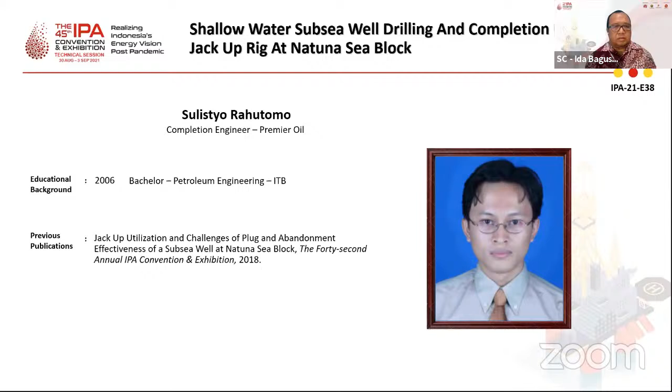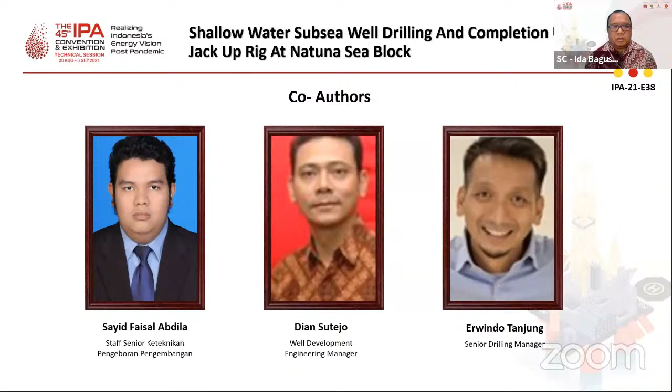The co-author is Bapak Sayid Faisal, senior staff in drilling engineering development from SKK Migas. Bapak Dian Sutejo, Well Development Engineering Manager from Premier Oil, and third is Bapak Erwindo Tanjung, senior drilling manager at Premier Oil as well. So we can start the presentation.

Hello, good day, ladies and gentlemen. Allow me to introduce myself. My name is Sulistyo Rahutomo from Premier Oil, and I am delighted to be here today to present the paper that I wrote together with my colleagues Pak Faisal from SKK Migas, Pak Dian, and Pak Erwindo from Premier Oil. The paper title is Shallow Water Subsea Well Drilling and Completion Utilizing Jack-up Rig at Natuna Sea Block.

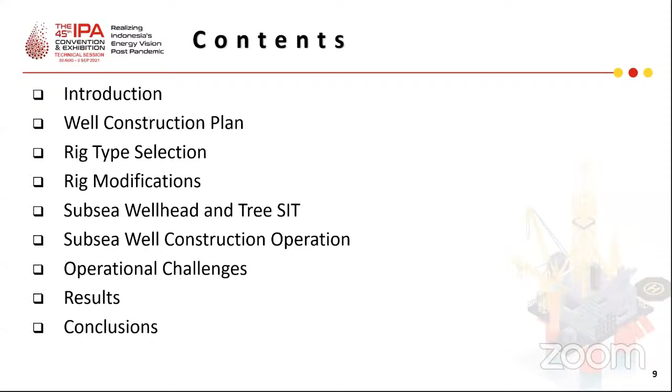The content of my presentation is as follows. I will give a brief introduction about the project, then explain the well construction plan to achieve subsurface objectives. Then I will explain why we selected jack-up rig type to execute the project campaign, followed by required rig modifications to perform subsea operation. I will also give a brief explanation on subsea wellhead and tree system integration test, continue with subsea well construction operation, share operational challenges faced during operation, then discuss the results of the campaign before concluding.

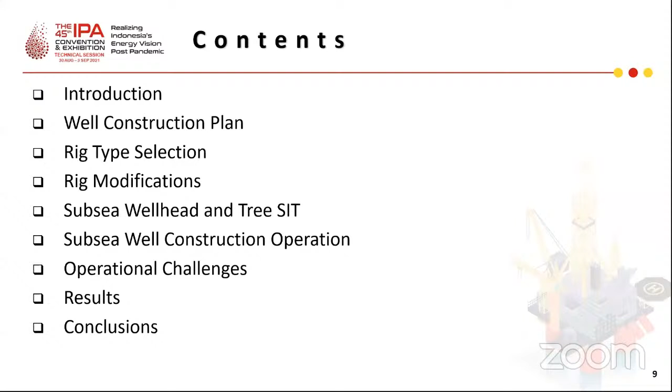The subsurface objectives for S1 and S2 wells target the same formation but different hydrocarbon traps, while the subsurface objective for S3 well targets a deeper formation, consisting of 2 zones, and requires intelligent completion to enable remote production selectivity over the 2 produced zones.

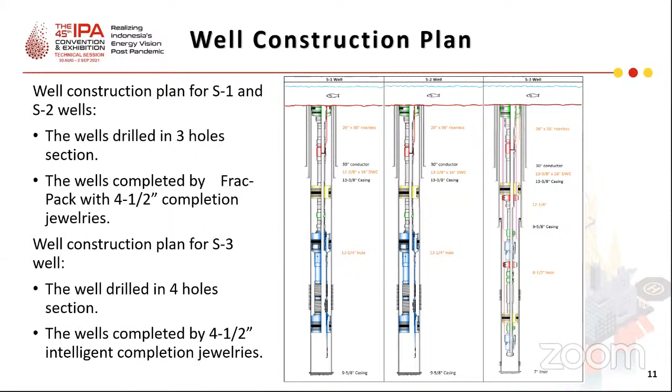As explained in the introduction, the project is required to be executed in one single drilling campaign, so the only rig option is jack-up rig type. Based on tender results, the selected jack-up rig has a Keppel-FELS Super B class design. After identifying the drilling rig contractor, collaboration work started between the drilling rig contractor, subsea wellhead and tree service provider, and Premier Oil to identify the required rig modifications to enable subsea operation.

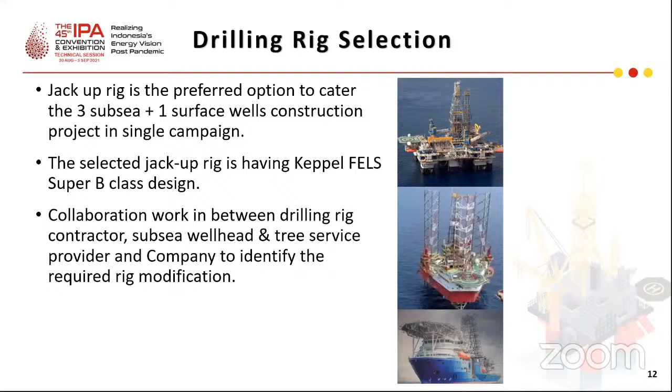There are 5 identified main key major subsea operations which require rig modifications. First, the subsea tree prior to installation requires preparation and inspection by the service hand, so temporary storage on the rig is required. To answer this requirement, the CTU deck will be enlarged to accommodate temporary storage of the subsea tree.

Second, the high pressure riser nipple up on top of either the high pressure housing or subsea tree requires tensioning as per riser tension analysis, so a means to provide a tension system is required. To answer this requirement, the rig fabricated a suspended Texas deck, or STD, hung under the rig floor to support high pressure riser tension.

Third, when subsea equipment is deployed subsea, it requires a guideline to allow guidance resulting in smooth installation process. To answer this requirement, the winch is required to be replaced with one suited to the water depth.

Fourth, when performing subsea operation nowadays, the remotely operated vehicle is a must to support any subsea operations, so the rig is required to accommodate ROV spread installation on rig deck. To answer this requirement, the existing rig structure for ROV spread requires strengthening and extension.

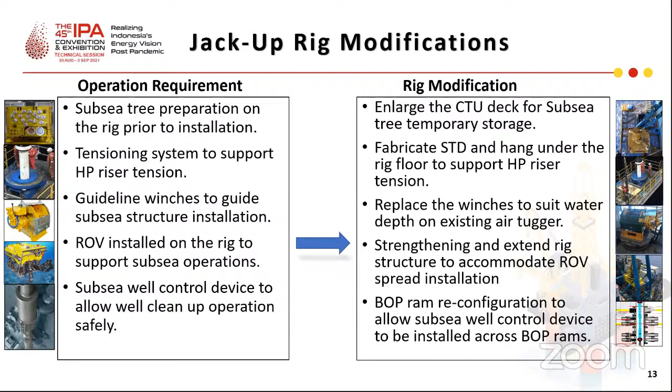When the subsea tree is ready for installation, the tree will be made up to the high pressure riser, then picked up using top drive before skidding the cantilever and rig floor to position the subsea tree to well center. After that, the subsea tree is deployed subsea on the high pressure riser until it lands and latches to the subsea wellhead.

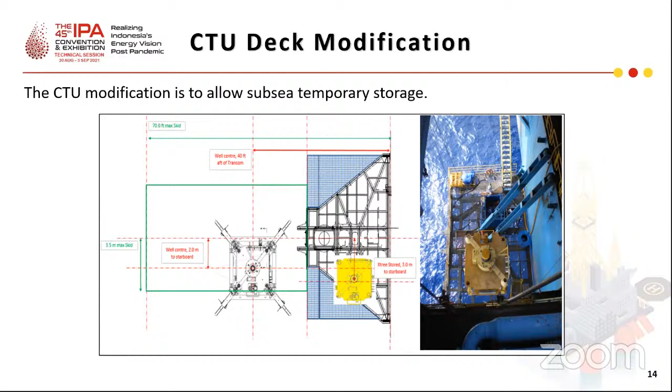The STD, or suspended Texas deck, can be elevated using air tugger arrangement and temporarily stored just underneath the rig floor. This is important because it serves two purposes: first, to allow picking up the subsea tree using top drive on high pressure riser for installation to the subsea wellhead; second, to allow temporary storage so that the rig can be mobilized from one well location to another.

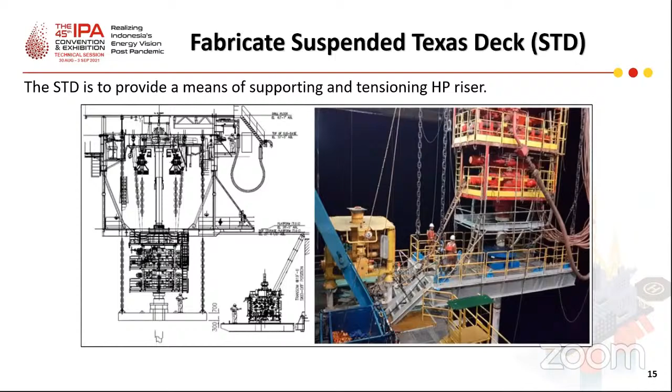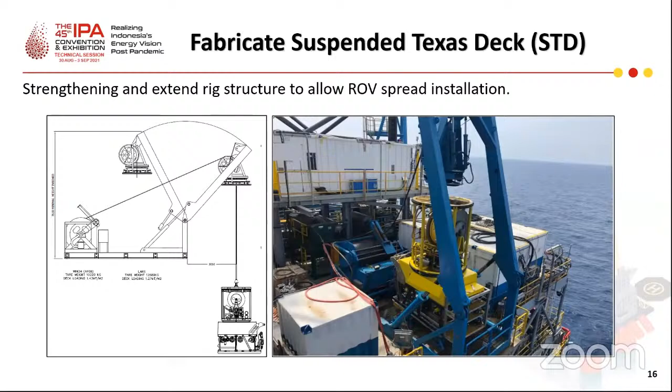We did the System Integrity Test, or SIT, to the subsea wellhead and tree system together with mock ROV and subsea control module. The SIT is to ensure subsea structure interface and installation are fit for purpose and avoid any surprise in the field. The SIT is run based on anticipated operation using the jack-up rig, and some findings are registered and rectified prior to subsea tree and wellhead delivery. Bespoke ROV tooling are also identified and procured accordingly.

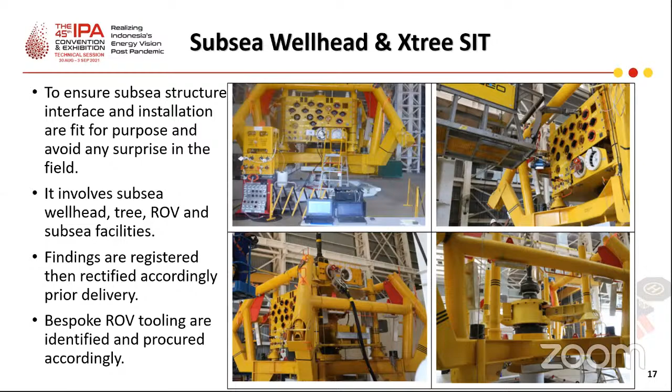During actual operation, we identified several operation challenges. First, there is always a first time for everything, and this also applied to us when we carried out subsea well drilling and completion using a modified jack-up rig. All crew members were not fully familiarized with subsea well structure installation using a modified jack-up rig, so in this case learning curve is key to enable operation timing improvement.

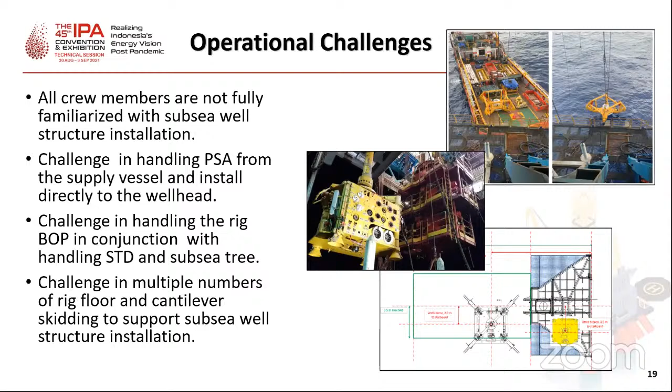If comparing the two wells' performance, S1 and S2, which share similarity in well construction, the recorded time was 52 days to complete S1 well and 35 days to complete S2 well, which equals 17 days of time improvement. There are several identified factors contributing to this time performance improvement.

First, all onboard crew members were learning from the repetitive subsea operation process. The more experience they gained, the more efficiently they performed the tasks, which represents what is called the learning curve.

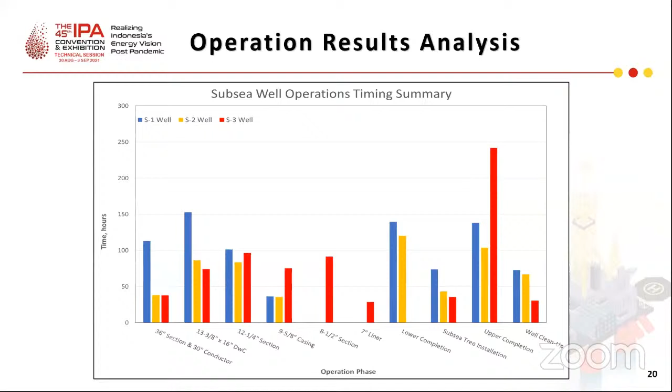Third, operating the STD was originally performed by BOP hoist. Then, on the next well, it was changed to be operated by air tugger with pulley arrangement to properly handle the STD load, which was faster and easier.

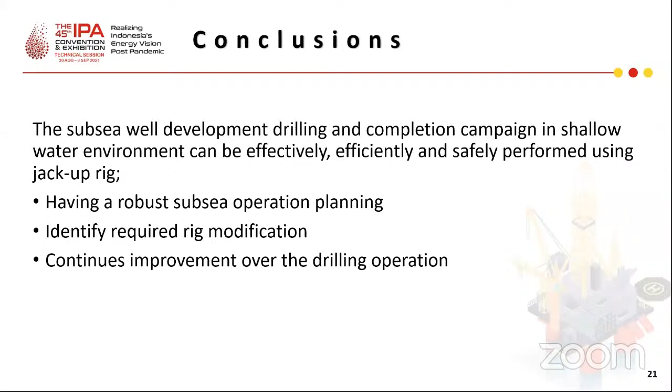I have now come to the end of my presentation. The conclusion is that subsea well development drilling and completion campaigns in shallow water environments can be effectively, efficiently, and safely performed using a jack-up rig by having robust subsea operation planning, identifying required rig modifications, and continuous improvement over the drilling operation. Thank you.

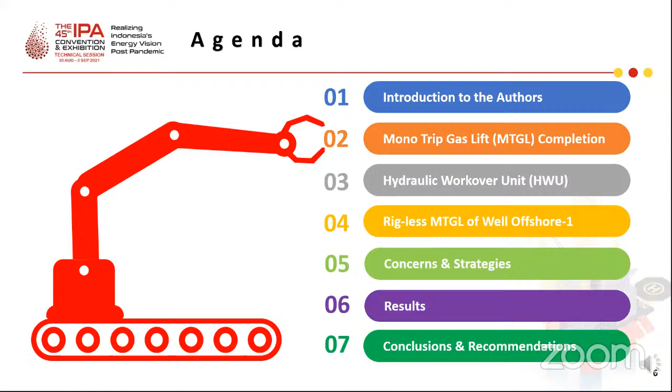This presentation is divided into 7 sections, with 6 sections remaining. During this presentation, I'll use the term MTGL alternatively for monotrip gas lift, and HW unit for hydraulic workover unit. Time is allocated to look into the MTGL concept as a completion type in section 2. Then we're going to look at the HW unit and compare it with a drilling rig in section 3. Section 4 will introduce the profile of offshore well one, whereby we performed the first rigless MTGL. Section 5 will introduce the concerns we had, including the strategies we agreed on as a whole team. Section 6 presents the results we obtained on this project. Finally, we expose our conclusions and recommendations based on our project execution in Section 7. We hope you all enjoy the presentation.

This section will cover the equipment required and the job sequence as well. MTGL is a completion technique to enrich the conventional monobore and dual monobore architectures to achieve time efficiency and enhance production in depleted oil zones. The MTGL is believed to improve the life of reservoirs and contribute to reducing completion costs. This MTGL technology has attracted our attention due to its success record in around 200 wells since it was patented by Baker Hughes in 2004.

Particularly in the Mahakam field, such MTGL jobs were executed by drilling rigs. Our data shows that 27 wells have been completed by MTGL since 2017. However, PHM's internal study elaborates that using drilling rigs is not favorable financially any longer. Hence, in September 2020, PHM appointed the hydraulic workover unit to perform the job as an alternative to existing practices. The ultimate objectives of this strategy are to improve efficiency, achieve production goals, and maintain safe operations for people, the environment, assets, reputation, and liability.

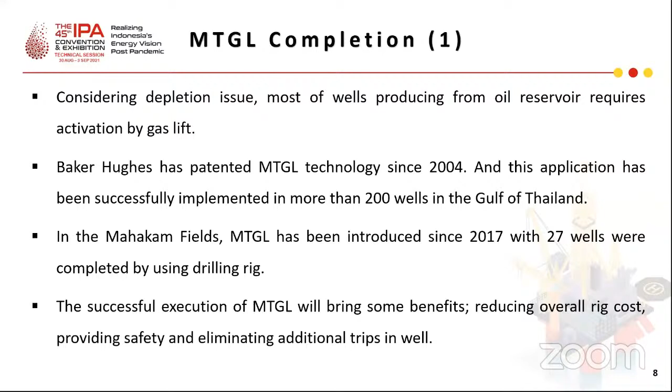Furthermore, we take a quick glimpse at the essential equipment of the MTGL job, taking direction from left to right, with equipment ordered from top to bottom inside the well. We can see tubing retrievable safety valves, or TRSV, 2.81 inch with 10 kpsi handling pressure capability; gas lift mandrel, GLM, with cement-through profile 3.5 inch also at 10 kpsi; hydraulic closed circulating valve, or HCCV, which is closed during cementing and needs to be opened afterward to clean out the annulus; production packer; and pump down plug, or PDP, with two sets of vanes as shown by the red circles. The purpose is to wipe excess cement out of the tubing walls, and it will land on a landing collar whose inside profile is designed specially for the PDP.

Regarding the operational sequence of MTGL completions, PHM has detailed procedures in the completion program of offshore one well as below summary. Cement bond logging, or CBL, to evaluate cement condition behind 7-inch casing, running in hole the completion string and pieces of jewelry, and land and lock the tubing hanger.

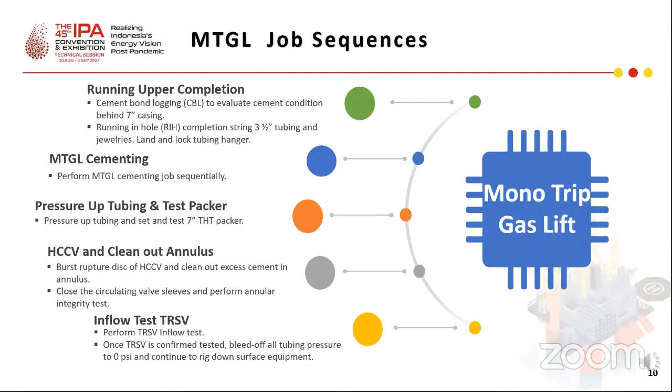Perform MTGL cementing job sequentially, pressure up the tubing, set and test the packer. Burst rupture disc of HCCV and clean out excess cement in the annulus. Close the circulating valve sleeves and perform an annular integrity test. Perform TRSV inflow test, and once TRSV is confirmed, bleed off all tubing pressure to 0 psi and continue to rig down surface equipment.

Getting into section 3, we will explain a HW unit in a nutshell and some elements to compare it with a drilling rig.

A hydraulic workover unit is a hydraulically powered jack capable of pulling and running jointed pipe of a well. It comprises guy wires, a blowout preventer (BOP) system, staircases, window basket, jack basket, working basket, and gin pole. In Mahakam operations, we use the HW unit to perform some works that used to be done by a drilling rig, i.e. plug and abandonment and gravel pack completions, apart from intervention jobs.

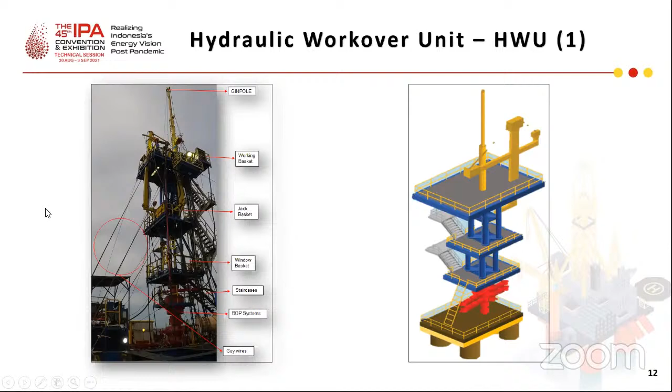This slide illustrates a couple of items that we take to compare a hydraulic workover unit with a drilling rig. Related to site preparation, the HW unit is more beneficial since our record shows it will take an average of 121 hours, or 5.04 days, to move, anchor, rig up, rig down and de-anchor the unit. Meanwhile, a drilling rig will need an average of 10 days to do the preparations.

Regarding tripping speed, it is noted that a drilling rig is faster due to its mechanical and construction design. Our record shows the HW unit gets 75 meters per hour while the drilling rig can go 95 meters an hour to run the upper completion string. This is the most significant element in comparing the performance of both units.

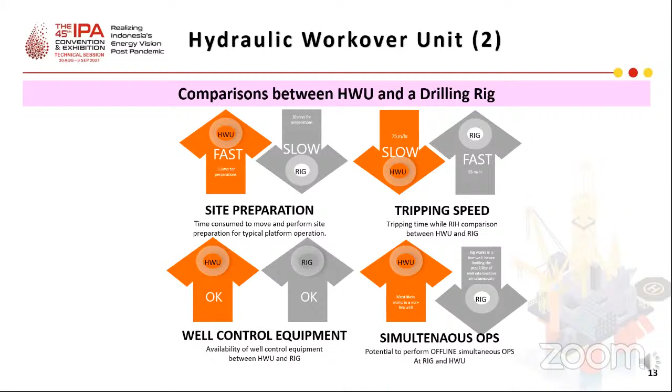Moreover, both the hydraulic workover unit and the drilling rig have a non-compromise BOP system that complies with our rules and international standards. Finally, a hydraulic workover unit is more favorable to enable simultaneous operation with the well intervention system, since the unit most likely works in a non-live well.

The tie-in point was at 985 meter measured depth, with total depth of 2,774 meter measured depth, or 2,354 meter true vertical depth. The well has a maximum 62-degree inclination, with 32 degrees as the final inclination.

7-inch 32 ppf casing was set at 2,771 meter measured depth, cemented the casing without any losses as per the cementing report.

In addition to the information of completion equipment in the previous slide, this well will equip 3.5-inch 9.2 ppf tubing to be set at 2,731 meter measured depth, and a float collar which was set right above the float shoe at 2,730.5 meter measured depth. Two pup joints of 3.5-inch as the markers, and a 7-inch permanent packer to be installed at 1,470 meter measured depth, and this depth was designed as the top of cement behind the tubing.

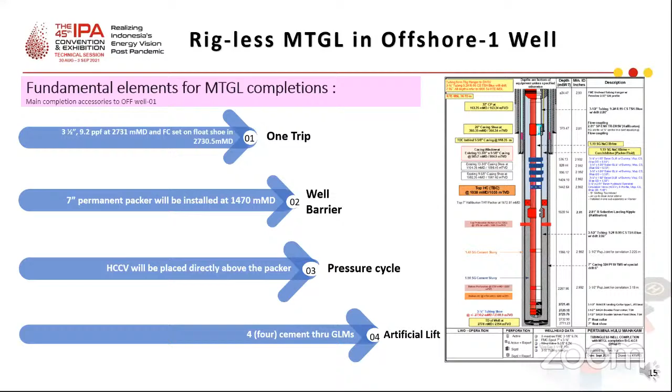Stepping into section 5, we'll set out the concerns and the strategies we composed and agreed on as a whole team.

The first time you do a thing is exciting. That quote has exactly depicted our journey on this project. Also, PHM intended to do it right the first time. Taking challenges as opportunities, we began our journey by establishing excellent communication and enforcing success to all stakeholders.

We identified three main concerns in the preparation phase: cementing engineering, chemicals and equipment; other equipment and contract management; flow rate for packer; and top of sediment, or TOS, issue. Each concern is explained on the next slides.

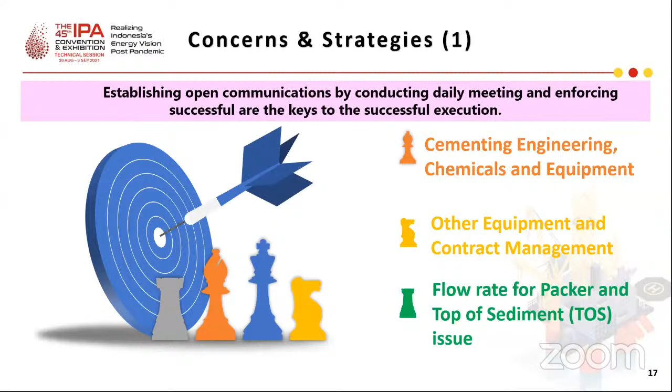Firstly, we'll talk about cementing engineering, chemicals, and equipment. MTGL cementing will need slurry composition to meet PHM standards. Besides, it will require simulation and calculation to determine a couple of things such as centralizer standoff profile and the surface pressure when the plug bumps.

Unfortunately, the requirement is not covered within the existing contract of HW unit. Besides, the contractor hasn't had any experience in conducting such MTGL cementing job, thus limiting their knowledge to PHM cementing standards in slurry properties requirement and the how-to procedures.

Therefore, PHM engaged another cementing company to help the contractor in preparing the job. Series of meetings and discussions have been conducted to ensure that the contractor can provide the requirement in due time. Another thing is to ensure that the pumps are fit for MTGL cementing purposes. PHM and the contractor agreed to perform some tests for the cementing pumps. Incorporating the simulation result in the testing plan, PHM set the details as described on the next slide.

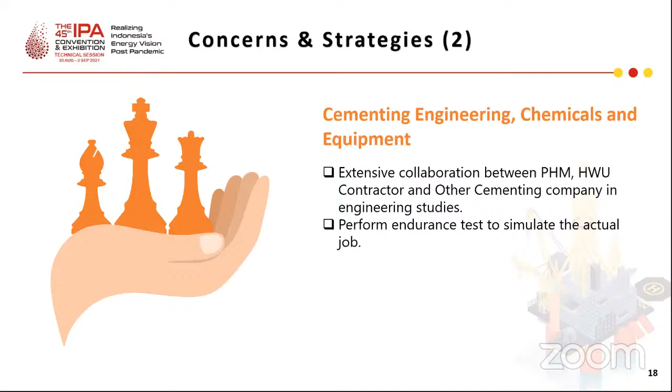Second point is other equipment and contract management. In HW unit, there are many services managed through a call-out contract. Therefore, PHM arranged a negotiation meeting and jotted down a list of equipment required that fit for the MTGL job only, with some discount schemes. Another example, a drilling rig also has a monthly package contract with electric line provider to

perform CBL, whereas HW unit has only a call-out contract. Consequently, it will be more expensive to conduct CBL by electric line in HW unit rather than in a drilling rig. To manage the challenge on the contract side, we then conducted CBL in memory mode on slick line, and we have obtained a reliable result of CBL with a more reasonable cost performed in such way.

Finally, the flow rate for packer and top of sediment, or TOS, issue. PHM has studied internally the height of TOS in the MTGL wells completion is around 16 to 21 meters, which has to be cleared out to access the most bottom zones. Remedial work would incur additional costs. Hence, the TOS became a significant challenge to overcome.

Based on the historical data, we identified probable causes. They are utilization of 4.5-inch landing joint, whereas the cementing plug size is only 3.5-inch, less efficiency of the cementing plug veins, and insufficient flow rate when displacing the cement.

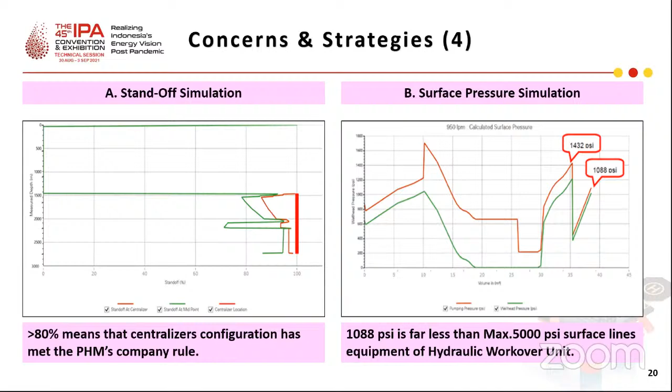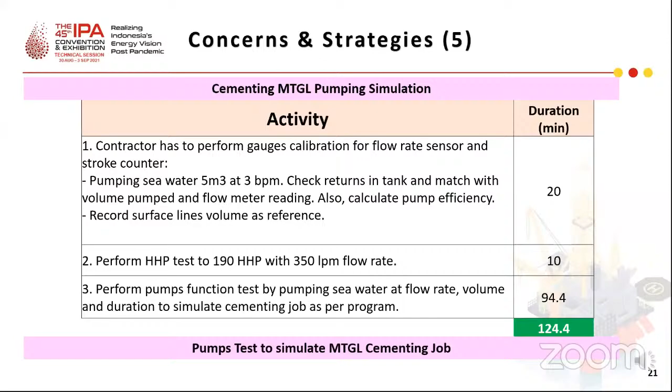As promised, we present this table to show each kind of test that the contractor has to do, including the minimum time required for each test as we obtain from the cementing simulation. As a bottom line, the MTGL cementing itself will require 94 minutes to complete the job. Hence, the contractor's pump has to endure that value. The test is also intended to ensure all surface sensors are in good shape to support this job. Finally, the horsepower test has to achieve 190 horsepower as required.

Section number 6 is going to explain the results we achieved on this project.

Regarding TOS, the 1.9-inch macaroni assembly has tagged TOS at 13 meters. Although the TOS is not as low as expected, the result has shown improvement in TOS height compared to previous MTGL wells. Another thing we'd like to share is regarding the cementing pump conditions. We had problems with transfer pumps when transferring cementing chemicals before mixing the slurry. Therefore, it is strongly encouraged to capture this lesson for the future, including the way to do a quick fix.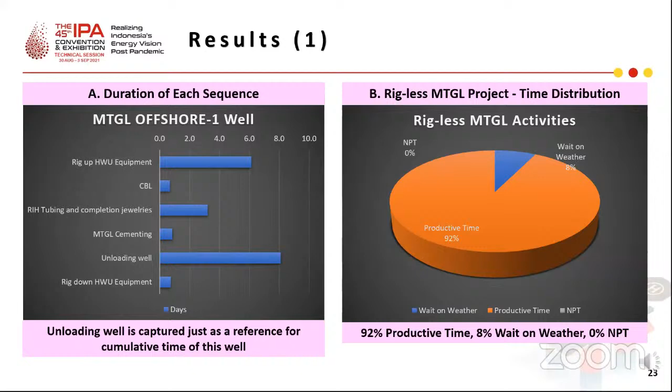Time consumed to run tubulars or completion equipment and to perform cementing itself have played dominantly in the performance measurement. In terms of costs, hydraulic workover unit is considered more efficient to perform MTGL completions rather than a drilling rig.

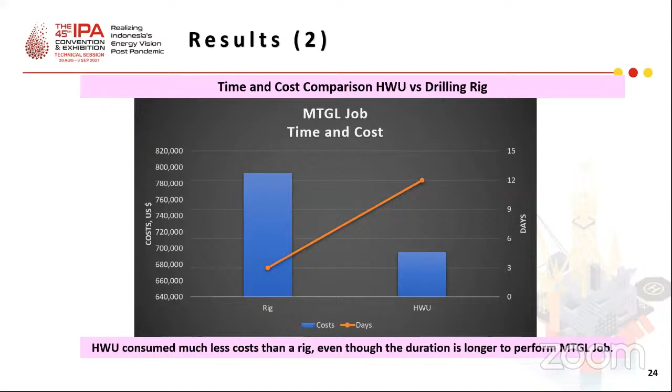Although some services and equipment to support this rigless job are on a call-out basis, the strategy to manage the challenge has successfully optimized the expenses. The effort has been paid off by saving 12% compared to a similar job by a drilling rig.

That brings us to the last section of the agenda. I'd like to summarize with a couple of conclusions and recommendations based on our case study as follows.

Hydraulic workover unit has proven as an alternative method to perform the monotrip gas lift completion efficiently and safely in offshore oil wells. It has contributed to savings compared to a drilling rig for a similar job, meeting the objective of executing the rigless monotrip gas lift.

Although time spent by HW unit is more than a drilling rig, the rigless MTGL performance still can be improved through a continuous learning curve.

Besides maintaining the methods we have applied, we strongly recommend modifying the vanes of the wiper plug with careful examination and engineering study by the equipment provider, as this provides more efficient wiping of excess cement in MTGL wells for future jobs.

After all, it is worth examining the services and equipment contracts and fine-tuning the most efficient initiatives to reduce expenses, thus increasing savings.

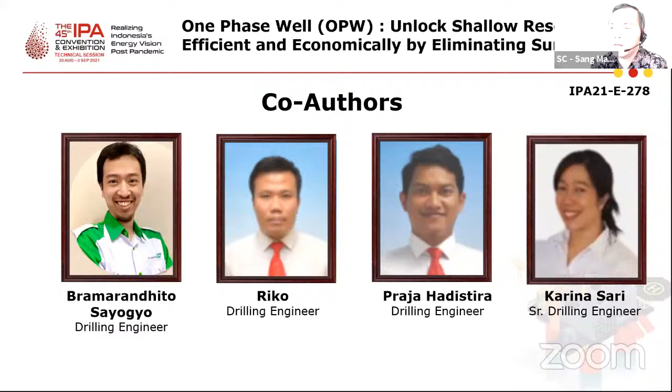Hello, ladies and gentlemen. Today I would like to present our topic at the 45th IPA Convention and Exhibition: Realizing Indonesia's Energy Vision Post-Pandemic. Our topic is one phase well, OPW, unlocking shallow reservoirs efficiently and economically by eliminating the surface casing. The authors are Irfan Hanif, Bramarandhito Sayogyo, Riko, Praja Hadistira, and Karina Sari, all from PT Pertamina Hulu Mahakam.

Here's our outline. I will divide this presentation into three parts. First, background and objective; second, history and methods; and finally, results and conclusions.

Let's begin with the first section about background and objective. I will tell you about the Mahakam problem in the current situation, and our objective to solve our main problem in the Mahakam area.

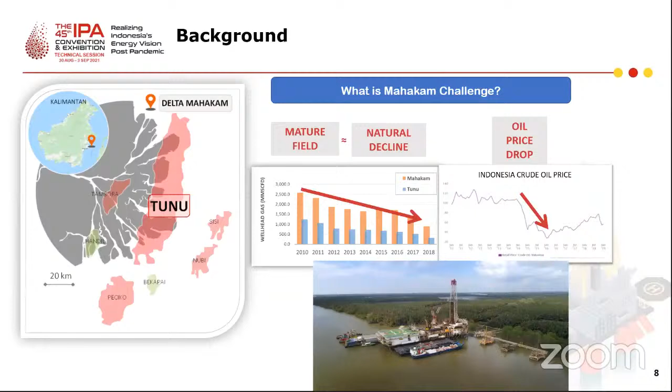To be specific, Tunu Shallow has been developed in Mahakam, with depths between 50-100 meters down to 2,000 meters of well depth. Tunu is drilled in two phases: first drilling the surface section, then continuing to drill the reservoir section.

So our main problem is we need to reduce the duration of constructing the Tunu shallow zone, and also to cut the cost for constructing Tunu in the shallow area.

Let's talk about our objective. First, our objective is to unlock marginal reserves. As I told you, Tunu is a mature field with natural decline in gas production, so our reserves are getting more depleted too. We need new innovation to unlock the marginal reserve and make the well economical.

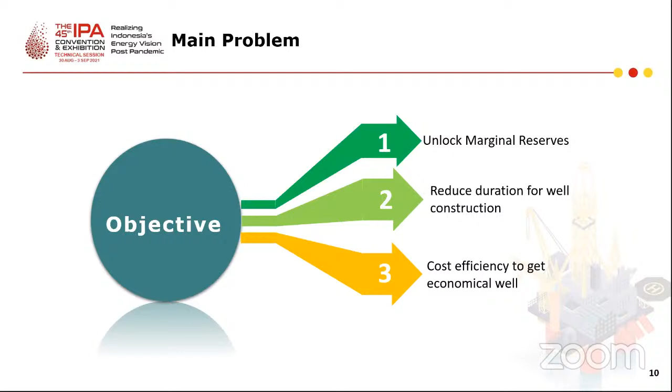Let's start the second section. Here I will tell you about the history of the Tunu area and the methods of our one phase well innovation.

Here's our roadmap to one phase well in the Tunu area. In the beginning of 2006, we started to develop two-phase drilling, drilling the surface section and continuing with the reservoir section in shallow or main zone. This procedure has been proven due to operational feasibility.

In the beginning of 2007, we started to develop the Tunu shallow area. In 2018, we started replacing our synthetic-based mud with water-based mud. This is also a proven concept, so in the Tunu area we now drill the shallow zone using water-based mud, both in surface section and reservoir section.

In 2018 also, we started drilling using diverter in the reservoir section, and it has been successful in TN-NN1 and TN-NN2.

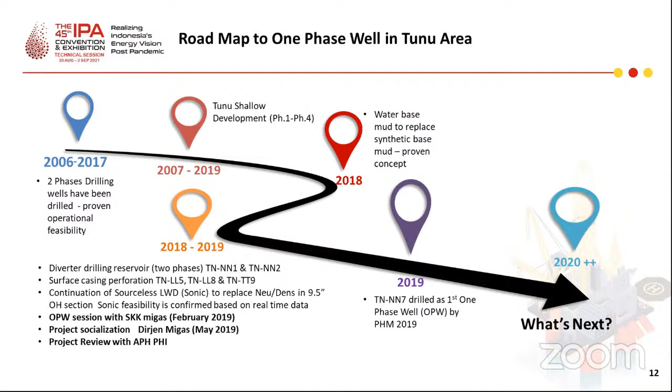So in 2020, what's next? We have been through all these steps until reaching success in drilling the first one phase well. So we hope we could industrialize the one phase well architecture.

Why OPW? We hope OPW could help us lower costs and shorten well duration, since in one phase well we eliminate the surface casing. By eliminating the surface casing, we hope to reduce well duration and lower our costs.

Second and third, OPW could increase the ECD window, reduce risk of stuck pipe, and be less prone to ballooning phenomenon. This is because in one phase well, we drill a 9.5 inch open hole using 5-inch drill pipe, or an 8.5 inch open hole using 4-inch drill pipe.

As I told you, 9.5 inch open hole with 5-inch drill pipe has more clearance compared to our drilling in reservoir section using 8.5 inch open hole with 5-inch drill pipe.

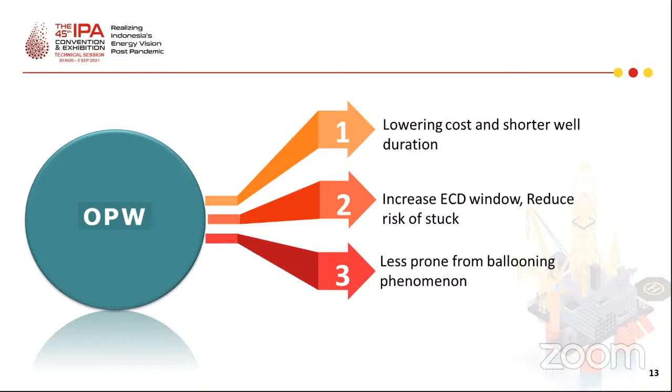So let's talk about the differences in architecture between one phase well and SLA. In Tunu shallow architecture, we drive the 20-inch conductor pipe prior to rig arrival, then continue drilling 12 1/4-inch surface section to TD, and continue run in hole 9 5/8-inch surface casing and cement to surface. After that, we start drilling 8.5-inch reservoir section to TD, then continue run in hole 3.5-inch tubing.

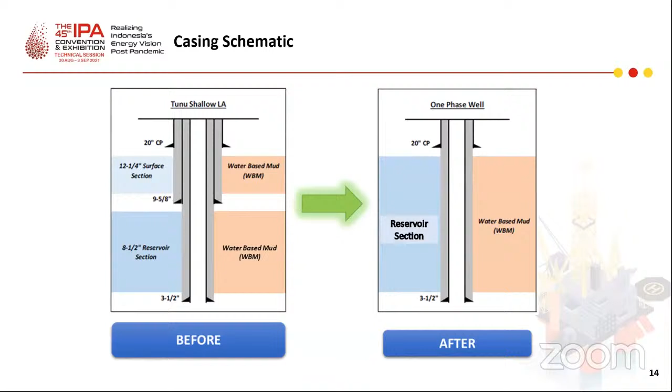In one phase well, we eliminated the surface section. We still drive the 20-inch conductor pipe, then continue drilling the reservoir section to TD. So the reservoir section will be 9.5-inch open hole or 8.5-inch open hole. In one phase well, we cement the 3.5-inch tubing up to surface. Both operations of Tunu shallow light architecture and one phase well utilize a water base mud.

Here are the methods between SLA and OPW. In both, we install conductor pipe prior to rig arrival. In SLA, we install the diverter, continue CP clean out using 12-1/4-inch BHA, then continue drilling 12-1/4-inch surface section to TD, pull out of hole, and run in hole 9-5/8-inch casing and cement, nipple down diverter, stack BOP, continue drilling 8.5-inch reservoir section to TD, pull out of hole, run in hole 3.5-inch tubing and cement, then nipple down BOP and install Christmas tree.

In OPW, we only install the diverter. We don't need to nipple down the diverter and stack BOP. After installing the diverter in one phase well, we continue CP clean out using 17.5-inch BHA. Why 17.5-inch BHA? We need to get good standoff between 3.5-inch tubing and the 20-inch casing CP, so we ensure our CP has a good clean out.

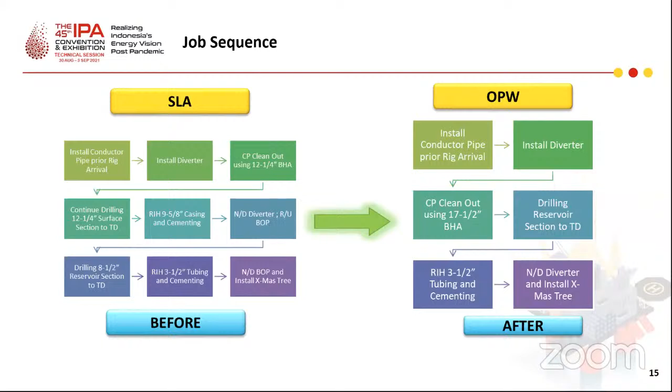In the final section, let's talk about results and conclusions of one phase well. From several operations of one phase well, we get a summary of results. First, in one phase well operations we have had no HSE and SQ incidents, which means in terms of safety, one phase well could meet the standard. In terms of well delivery, in 2020 PHM successfully drilled 15 plus one phase wells with average duration of 3.7 days, as I told you before.

In the beginning, our SLA average duration is 6.6 days, so one phase well could cut up to half the duration of constructing a well. In terms of cost efficiency, one phase well could optimize to 300,000 USD per well. As I told you from the beginning, our cost in constructing SLA is 3.65 million USD.

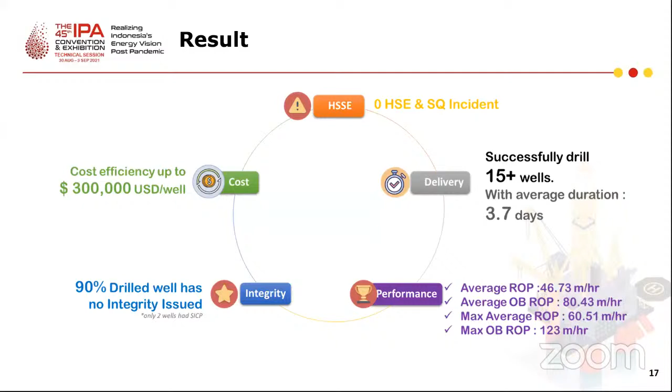So we get a small conclusion of one phase well from the result. We could reduce our well duration, optimize costs, have no HSE incidents, and one phase well has good performance. And lastly, 90% of one phase well has no integrity issue.

From the results I told you before, we could conclude several things about one phase well. First, one phase well has successfully performed cost optimization, up to 300,000 US dollars in value. And in terms of duration, one phase well successfully reduced the duration of well construction from 6.6 days to 3.7 days per well. In the long term, we could construct more wells compared to SLA in one year.

Second, one phase well still has big room for improvement, such as extending the one phase well architecture, like one phase well MTGL, one phase well GP, or one phase well SAS. For now, our team is still studying that improvement or initialization. And last, for constructing one phase well, we could possibly replace rig with HWU, so it means we could get additional cost optimization for one phase well.

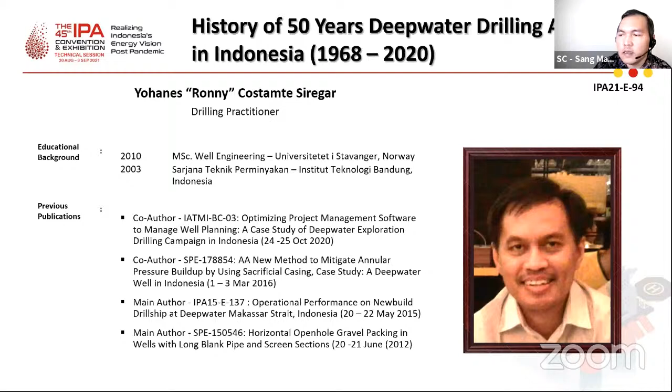And these are the co-authors of this paper. The first co-author is from Teknik Perminyakan University Pertamina, Pak Firman Cahya Putra Adistia. The second co-author is Rahmad Hidayat, from ITB as well, Petroleum Engineering. And then the third author is Pak William Lim, also from University of Pertamina, Petroleum Engineering.

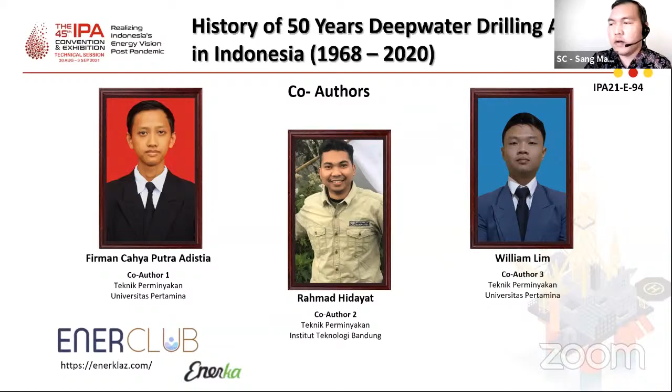Good day, ladies and gentlemen. Salam sejahtera for all of us. It is an honor to have the opportunity to present our paper about the history of 50 years of deepwater drilling activities in Indonesia since 1968 to 2020.

Before I start, I would like to give gratitude to Enerka for contributing to the EnerClub program, which is a forum able to facilitate students or fresh graduates collaborating with practitioners to do research together.

Outline of today's presentation: background of the study, methodology covering how we performed the research and the challenges we faced, results of the study consisting of details of history and statistical discussion, and finally the conclusion we have from the study.

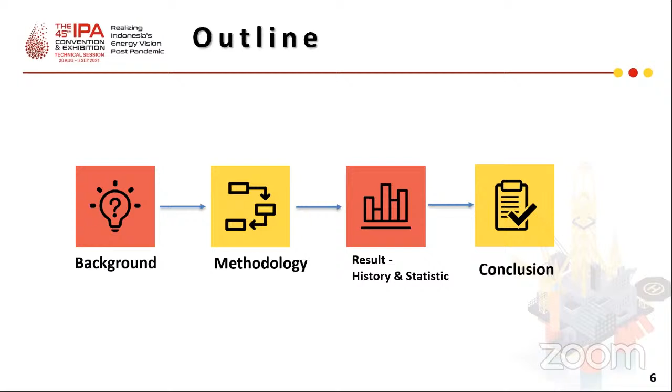This study is inspired by the curiosity to know the history of deepwater activities in Indonesia. Therefore, it is nice to start by looking back on the oil and gas activities in Indonesia from the beginning.

The first oil well was drilled at Cirebon in 1871. In 1968, the first PSC with a deepwater area was signed at offshore Timor. The first deepwater well, Alveolina 1, was drilled at South Java Sea in 1972. And the highest production of crude oil in Indonesia reached 1.68 million barrels of oil per day in 1997.

Currently, Indonesian production is dominated by gas compared to crude oil, with production contribution of deepwater wells only 7.7%. But on the other hand, approximately 70% of potential hydrocarbon reserves in Indonesia are predicted to be located in offshore areas.

Research of deepwater activities from 1968 to 1992 was done previously, but since then until current, no publication yet captures the whole activities of deepwater in Indonesia.

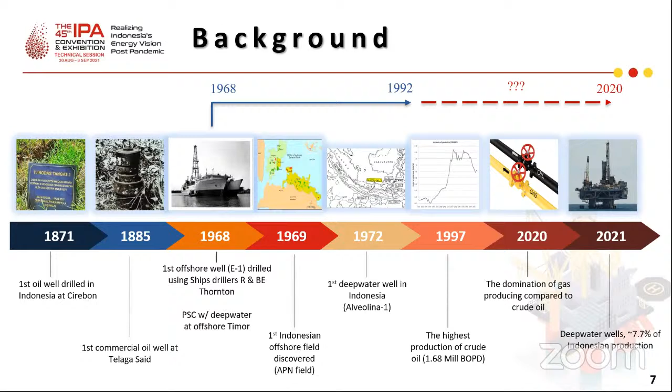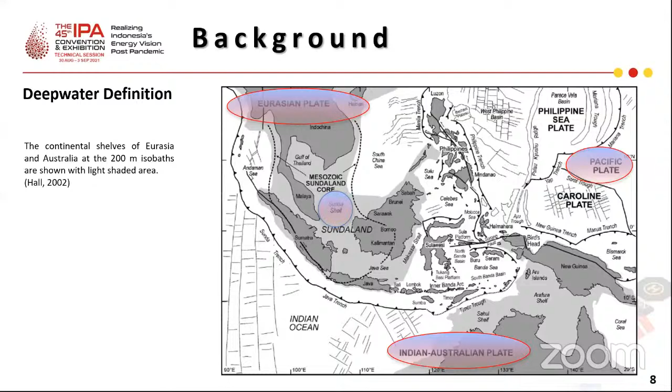Indonesia is a meeting point of three large tectonic plates: the Eurasian plate, the Indian Australian plate, and the Pacific plate, as shown in the figures. The big islands of Sumatra, Java, Kalimantan, and smaller islands in between are attached to the Sunda Shelf, which is part of the Asian continent. Further to the east, the big island of Papua and Aru Islands are attached to the Arafura Shelf and also Sahul Shelf, which are part of the Australian continent.

These two ancient continental land masses have relatively shallow water depth, not exceeding 200 meters. The area in between those continents is where deep sea could reach a water depth of 5,000 meters, where normally in this water depth it can only be drilled using floaters. That area is where the interest of the study lies.

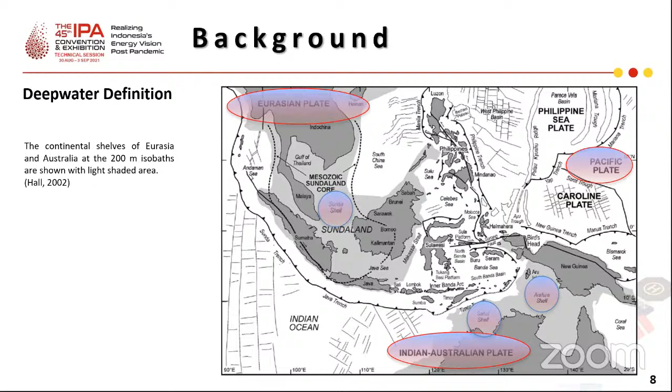Currently, over 800 sedimentary basins worldwide are identified. 128 basins, or more than 1/7 of them, are located in Indonesia. We were wondering which basins have a deepwater environment and what their status is - has it been explored?

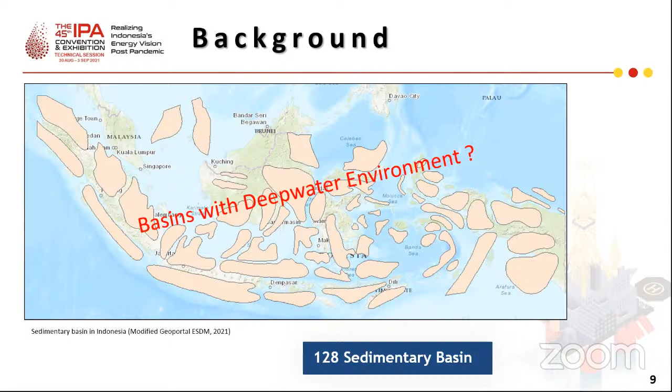The study started by screening the deepwater wells based on water depth and location. The next stage was gathering data from literature, such as conference paper publications, official government websites, etc., and also interviewing some practitioners.

The data was cleaned up, compiled, and validated, which ended up with 40 basins with deepwater environment and 276 deepwater wells identified. Each well consists of details such as well name, well type, year drilled, company name, basin, and so on. From here, the data was analyzed quantitatively as a basis for writing the history.

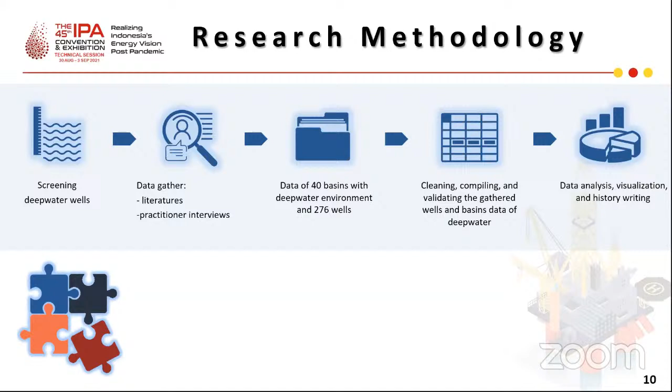One of the major obstacles during the study was lacking details on some of the wells. It was hard to find complete information, but overall the completeness of the data is about 88.6%, with some missing information as described here.

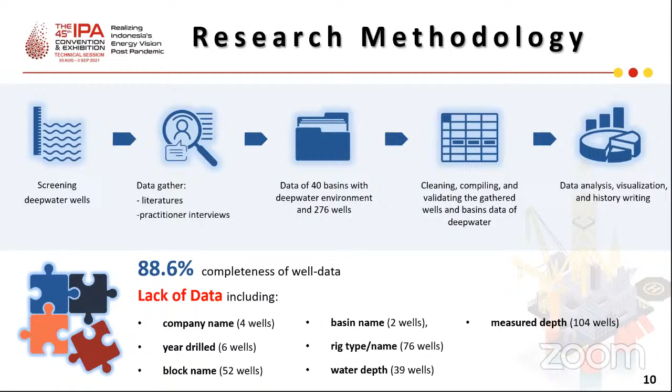Out of 128 basins, 40 basins are identified as basins with deepwater environment. Those are colored yellow and red. 33 basins are located in the eastern part of Indonesia and the rest in the western part. Yellow shows 17 drilled basins and red shows 23 undrilled or unexplored basins in their deepwater environment. From the figure, this shows most of the basins with deepwater environment at the western part of Indonesia have been explored.

Kutai Basin is the only basin with deepwater environment that has been produced. North Sumatra Basin, where Jambu Aye Utara Field is located, and Laut Timor Basin, where Abadi Field is located - these two basins have hydrocarbon discoveries and approved plans of development by the Government of Indonesia, but are not yet produced.

As previously mentioned, the first PSC acreage which included a deepwater area was awarded to International Oil in April 1968. The working acreage was located onshore and offshore Timor. In 1971, Shell signed a PSC for offshore South Java Basin, and 2 wells were drilled there.

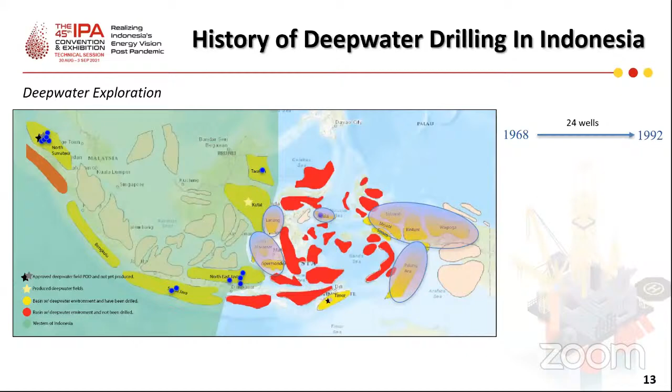On the very south and eastern Indonesia, where Timor Basin is located, Inpex drilled the first deepwater well in 2000, which discovered Abadi Field. The exploration activities continued until 2014.

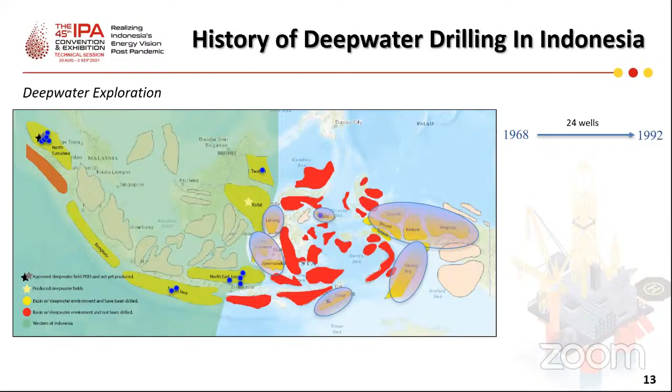Talking about deepwater development, so far only 5 deepwater fields are producing currently. They are West Seno, Bangka, Jangkrik, Jangkrik Northeast, and Merakes fields, and all of them are located at Kutai Basin.

Jambu Aye Utara field and Abadi field have POD approval in 2012 and 2019 consecutively, but not yet produced. An IDD project is ongoing for selling to a new owner.

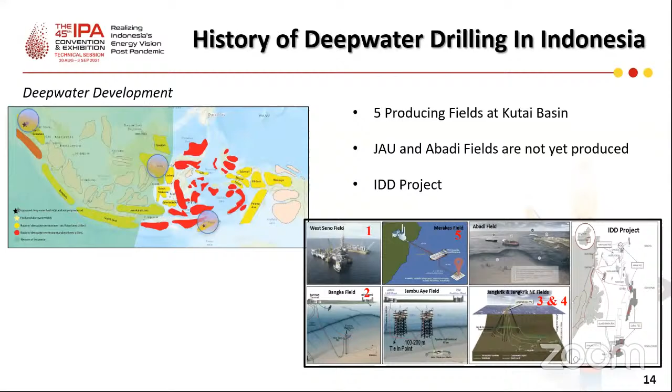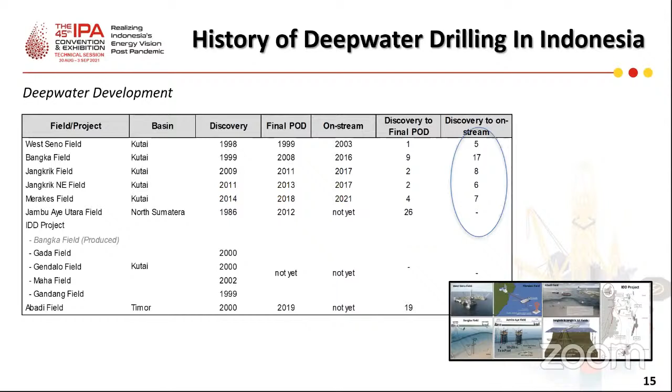Take a look at the distribution of drilled deepwater wells across Indonesia. At the western part, out of 7 basins, 6 are drilled, with 85% of all deepwater wells in Indonesia. Most of them are at Kutai Basin, which is mostly drilled by Unocal. And the rest were drilled at the eastern part of Indonesia.

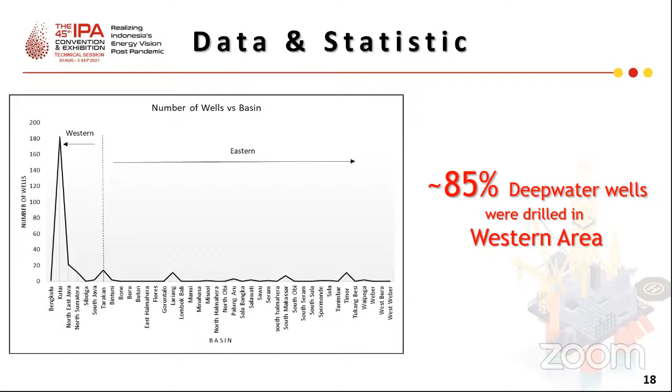30 oil and gas companies have been operating in Indonesia so far up to today. Unocal drilled the most deepwater wells in Indonesia, followed by ENI and Inpex.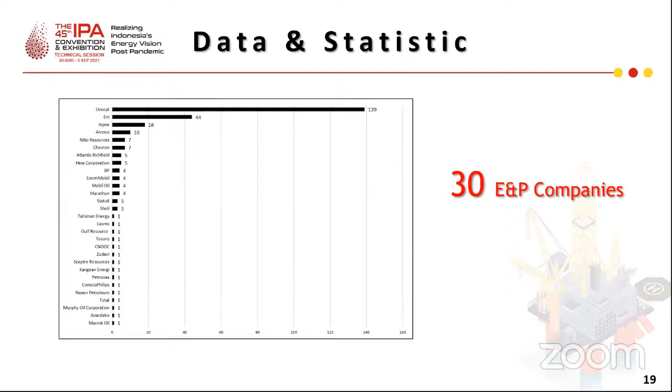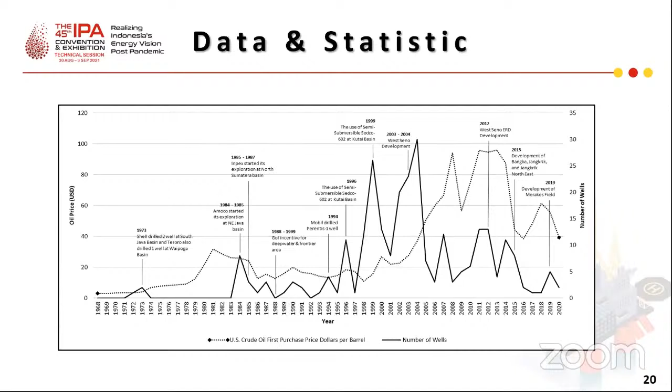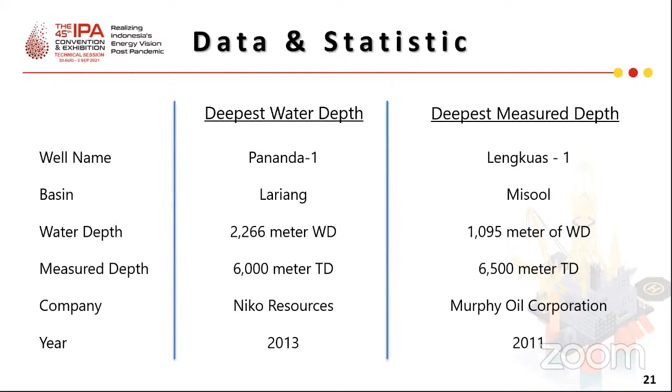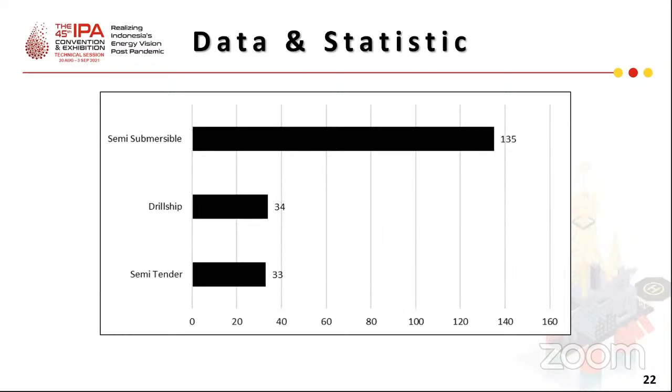Finally, the research provides a comprehensive historical record of deepwater drilling activities, both exploration and development production, in Indonesia for 50 years, since 1968 to 2020. 40 basins with deepwater environment and up to 276 deepwater wells are identified.

Recommendation: the accuracy and completeness of the data can be improved for future study. From this research, there is potential for future studies that could be done by utilizing the gathered data in this study.